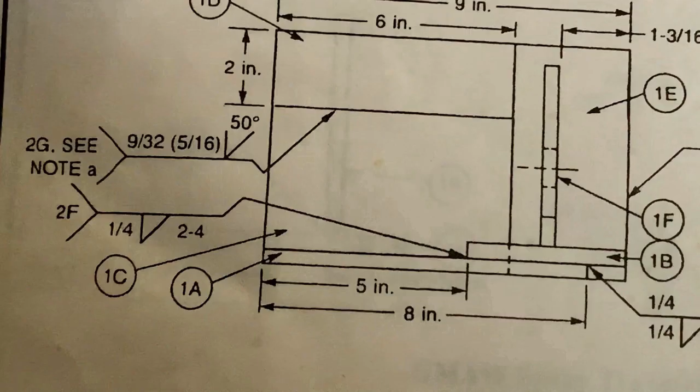My name is Vincent. In today's video, we will be continuing the topic welding symbols in fabrication. I will be interpreting the remaining welding symbols of the same drawing. So let us continue with the remaining parts.

Now this one, again it is a fillet weld on arrow side because it is given below the arrow. 2F is the welding position, that is fillet in horizontal position. Here you have to weld. Here you have to weld. Okay, here you have to weld in 2F. Quarter inch is the weld size according to the drawing.

And here you are given both side fillet weld 3F uphill. Here on this side as well as this side you have to do it vertical. That means here on this one, this side all the way up to here, and similarly from this side all the way up to here. Both side fillet weld, quarter inch size, 3F, that means vertical fillet.

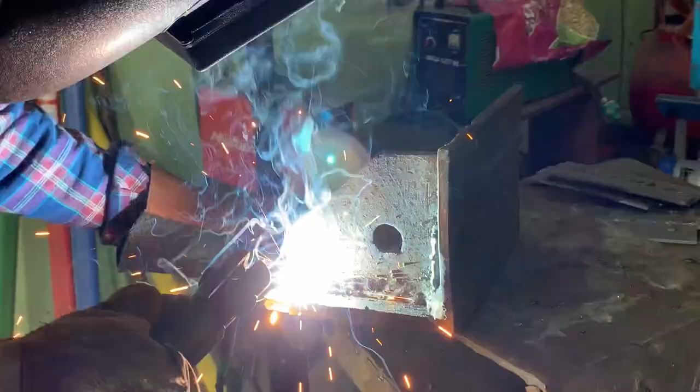Okay, and this one is quarter inch both side fillet weld. Here both side fillet weld in 2F position, that means horizontal position, that is here. From here to here and here to here you have to weld both sides. Okay, so these are the symbols on the top view.

Now in the side view, let us see. In the side view, this welding symbol is given. This welding symbol on this plate means again bevel groove weld on arrow side. Why arrow side? Because the welding symbol is given below the arrow line.

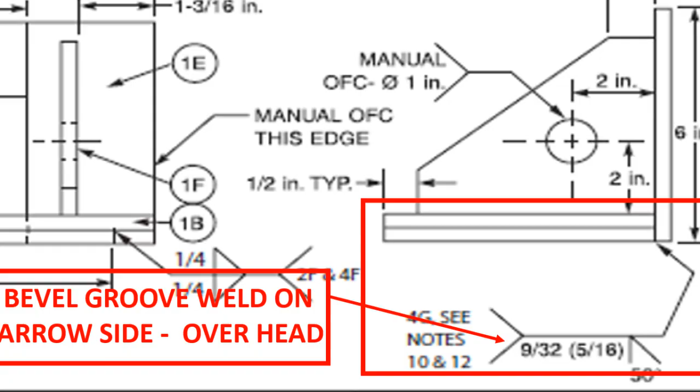So when the symbol is given below the arrow line, that means the preparation and welding is to be done on the arrow side. And the arrow is pointed on this plate. So you will have to prepare on this one the groove, a 50 degree bevel groove. From this view you will not be able to see that. We will go and see the other views.

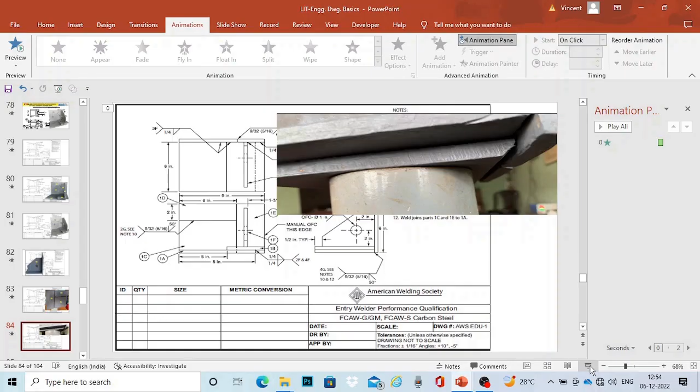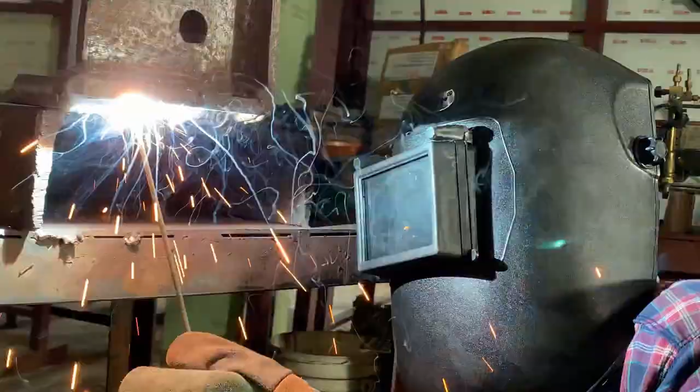This is it. This plate is this. This is plate 1A, and this is the side view of the actual job. And here you have to do the preparation, 50 degree, and you have to fill it up in 4G position. You have to weld this in overhead position. That is the 4G.

Here full penetration may not be required. That is given in the note. Here, see. So that is the meaning of this welding symbol.

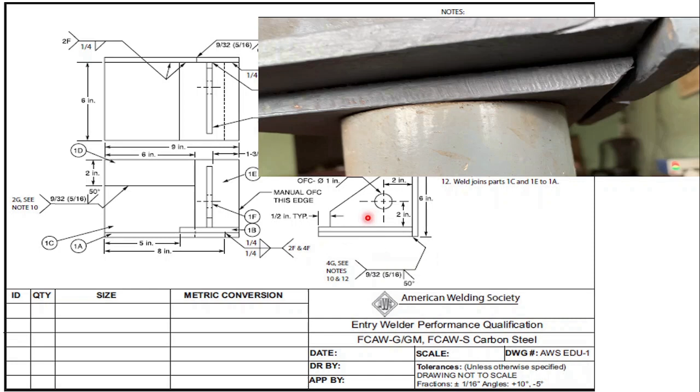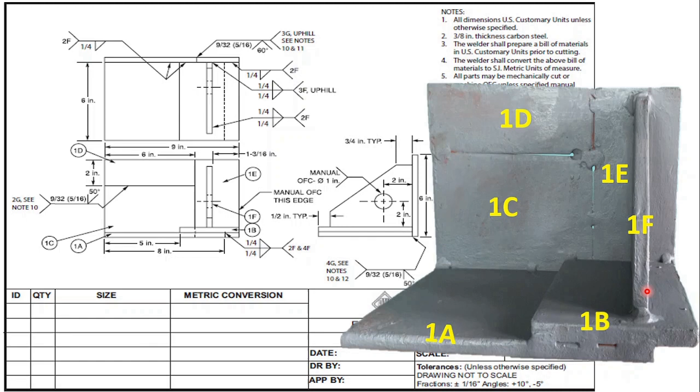Let us see the details of 1F, how it looks. This is the 1F here, and this is the shape of it in the side view. From the front view you will not be able to see it. So let us see the side view. Here it is 1F. This is an even better view, 1F.

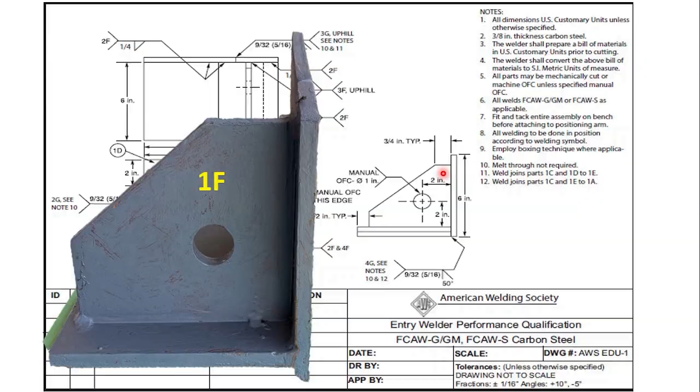The hole from here, 2 inch is the center of the hole. From here also 2 inch. And this hole is 1 inch diameter. You are supposed to cut it using OFC, oxy-fuel cutting, manual OFC. Then if you want, you can make it smooth like this. So let us conclude this part now.

Next few uploads will be based on 6GR welder qualification test and submerged arc welding, that is SAW.